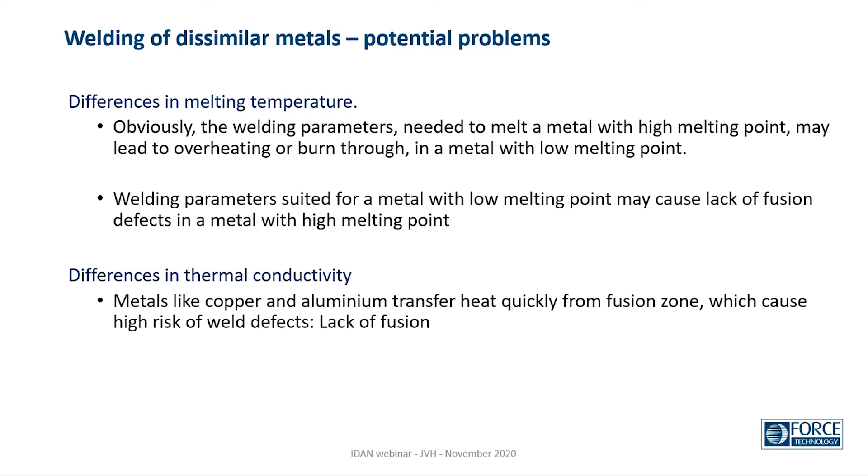Another issue is differences in thermal conductivity. Metals like copper and aluminium transfer heat quickly from the fusion zone, which causes a high risk of welding defects, such as lack of fusion.

We also see metallurgical problems, that is, problems with the metals in the melting zone or in the heat affected zone - brittleness caused by intermetallic phases, where metals combine in a way that causes brittleness in the weld metal. We might also have reduced ductility caused by precipitates. It's not strictly brittleness, but in a bending test there would be problems if we have too many precipitates, such as carbides or nitrides.

We might also have solidification cracks due to segregation in the weld metal, and differences in the necessity or response to weld preheating. One material might need preheating, while another would suffer from too much preheating. If we try to combine them, we need to find a compromise.

The same goes for post-weld heat treatment. Some metals would need it, and others would suffer poor properties after the same heat treatment.

We see differences in thermal expansion coefficients, which might lead to thermally induced fatigue. It's not a problem during welding, but in applications afterwards. If temperature goes up and down, the two parts don't follow each other exactly, and we might get cracks in the weld or next to it, depending on what is the weakest point.

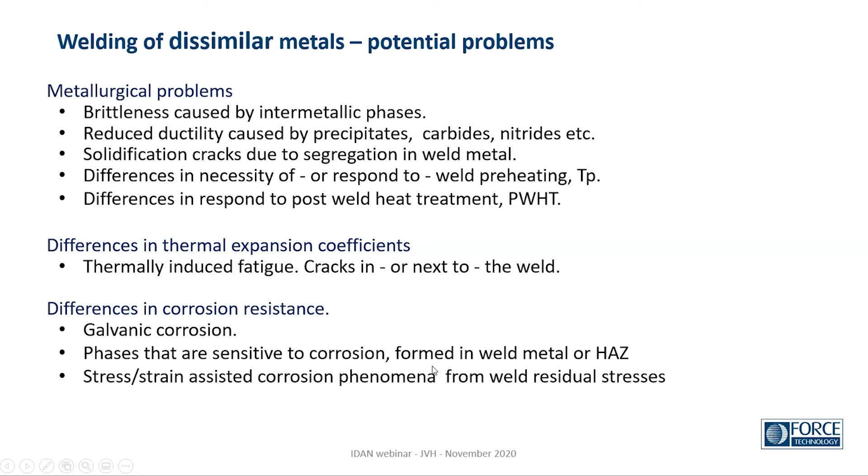In the weld structure itself, we might get phases sensitive to corrosion formed during solidification. We also have residual stresses around a weld, and some corrosion phenomena are related to these stresses. Of course, items which have not been welded don't have these stresses, so there's less risk of corrosion.

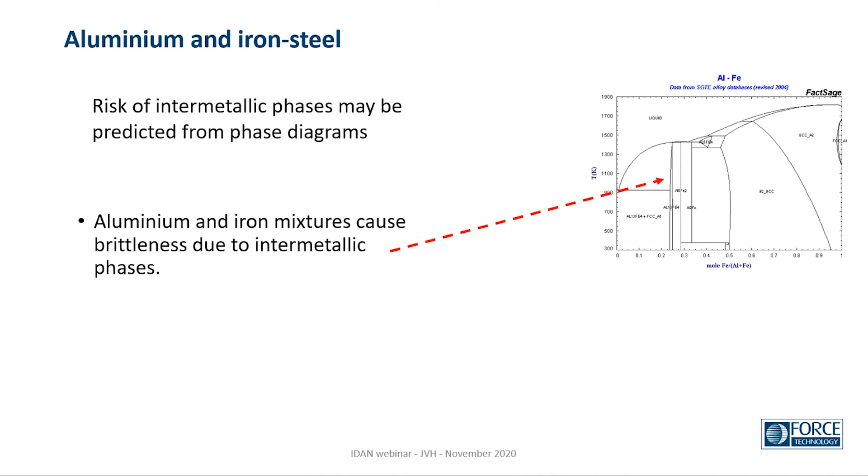An example: if we try to weld aluminium and iron or steel, we have a high risk of intermetallic phases. Theoretically, we could look at phase diagrams and see that this combination of metals has areas where these intermetallic phases form. So we can predict that if we're in this combination range, we might get problems, and these phases cause brittleness in the weld metal.

Titanium is another metal that's problematic to weld to other metals. It's almost impossible to weld titanium to other metals by conventional fusion welding - we get brittle phases with most other metals. As I've read, though I haven't tried myself, if we weld a titanium part using stainless steel filler metal, we can hear cracks forming, creating noise during welding.

There are some metals that we might be able to weld titanium with, such as zirconium, tantalum, or niobium. We do see that some problems with dissimilar welds, including titanium, are controlled by using tantalum as a buffer layer, but it's very rare to see it done.

Some examples of welding titanium to an iron-nickel-cobalt alloy - you can see the cracks that have formed due to the brittleness.

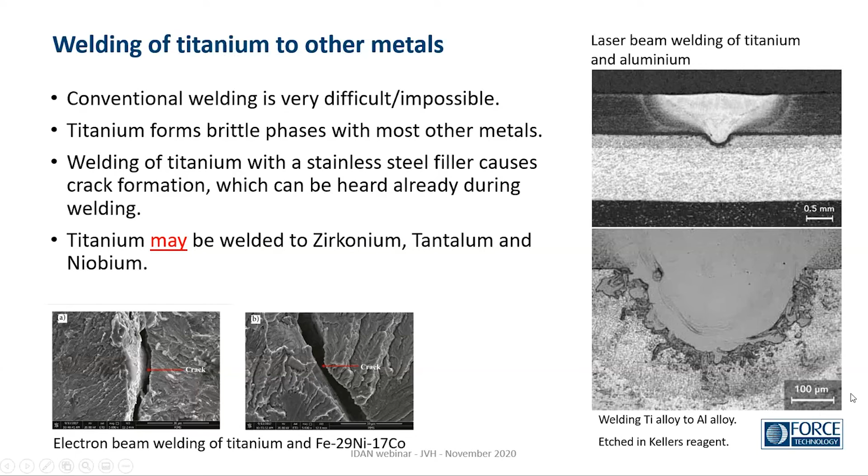A similar example for aluminium to copper - it appears as if we have made a joint, but when we look into it, the border faces are cracking, and we can't put any loads on a joint like that. It will crack or come apart.

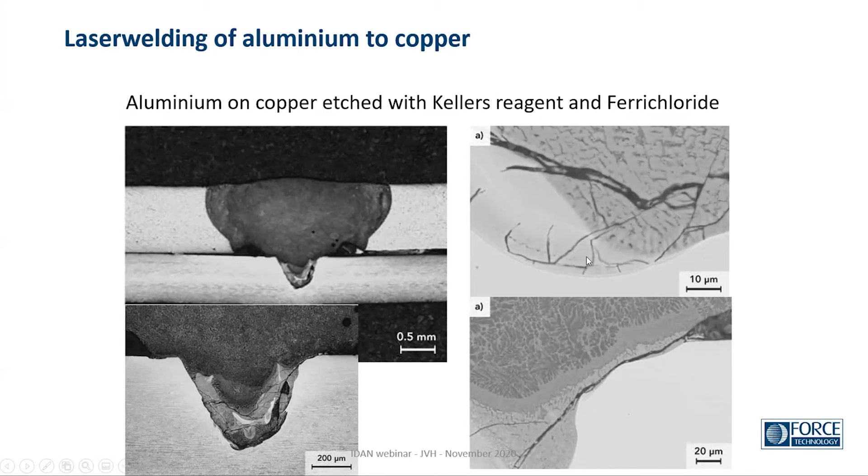We also have copper to iron, which is giving problems with solidification cracking. In this example, we have a crack along the center of the weld. Some of you might recognize it as similar to hot cracks that we see when the surfaces are contaminated or the material is high in sulfur.

Here we have made a similar crack by increasing the copper content. In fact, it's a sample that I've had made myself. It's a steel plate with another small part of steel on top of it, and between those two, a 1 millimeter sheet of copper. Welded together, we get these nice cracks.

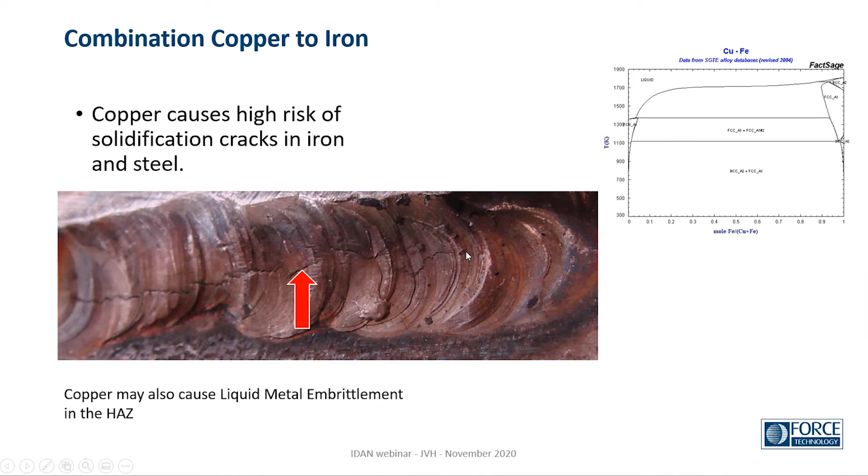A question? No. Okay.

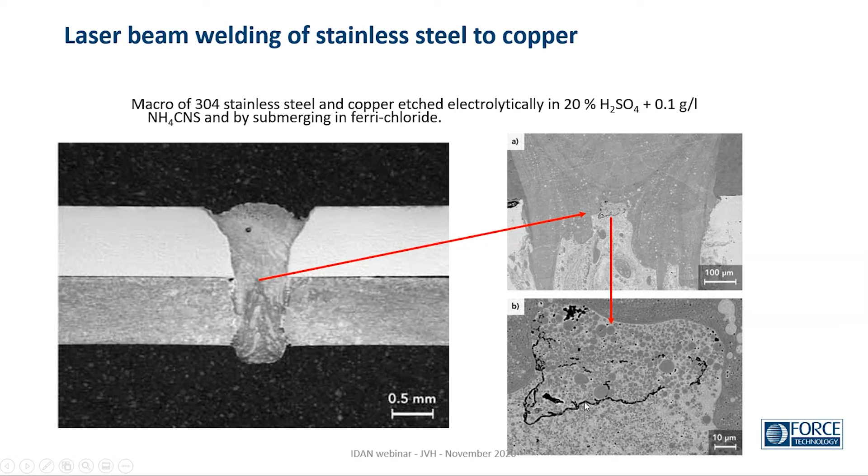Laser beam welding of stainless steel to copper. Again, we can see that we have succeeded in welding, but the properties of the joint are poor. We have cracks in the weld metal, which would probably release a fracture if loaded to a high load.

General remedies to the metallurgical problems. Some problems might be solved by choice of filler material, throwing the weld pool composition away from the risk of having intermetallics or solidification cracking, whatever the problem might be. A well-known example of that is welding stainless steel using the Schaeffler diagram.

It's a small one over here, we will return to it shortly. Or it could be using a nickel filler for the welding. Nickel is very much able to contain other metals and impurities, and by that avoid having problems.

We could also, the reason why laser has been researched into, is that if we can select a process and welding parameters to minimize segregation, then we would have less problems. The fast solidification works against having sulfur or whatever is causing problems concentrate during solidification. We have more grains and more grain boundaries to distribute the impurities on.

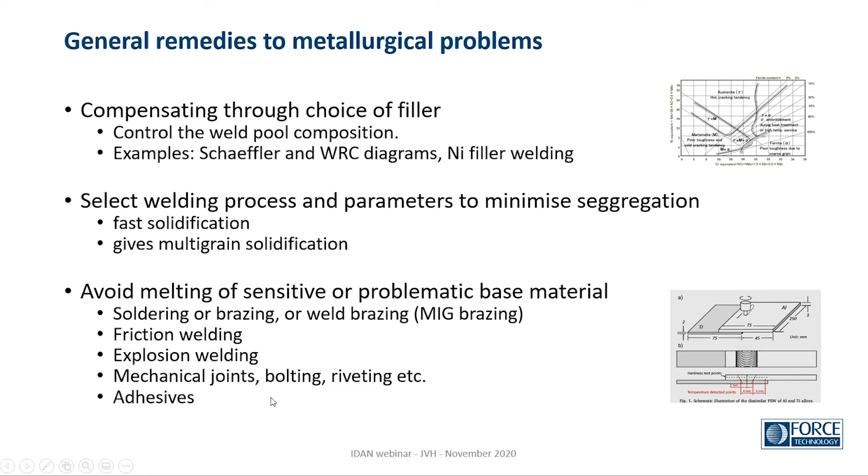So to list some of the processes that we might choose between: arc welding with compensating filler buffer, as we just talked about. Weld brazing might be MIG or TIG. It could be CMT, which is a process some of you might know, the cold metal transfer, which is a MIG process where the...

...formation of filler material is controlled so that we transfer it at the lowest possible temperature, but still above what we see in short-circuit welding.

Explosion welding. Friction welding includes the friction stir welding process, which we will also look into shortly. Ultrasonic welding is used, some of you might know it from welding of plastics, but there are some specific welding jobs which is made by ultrasonic welding.

I've seen very thin foils welded for electrical switches where they use ultrasonic welding. Diffusion welding, again, a very special technique where you have very smooth, very clean surfaces, pressed together and increase temperature. At a certain level of temperature, atoms would jump from one side to the other, and that way we will have a weld. It takes vacuum, it takes high temperature, and it takes time. So I think this is a research technique. I've seen very few examples of this kind.

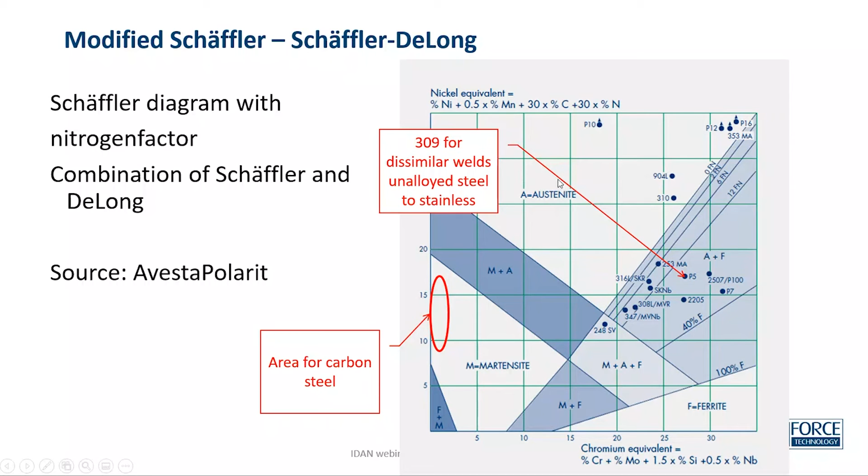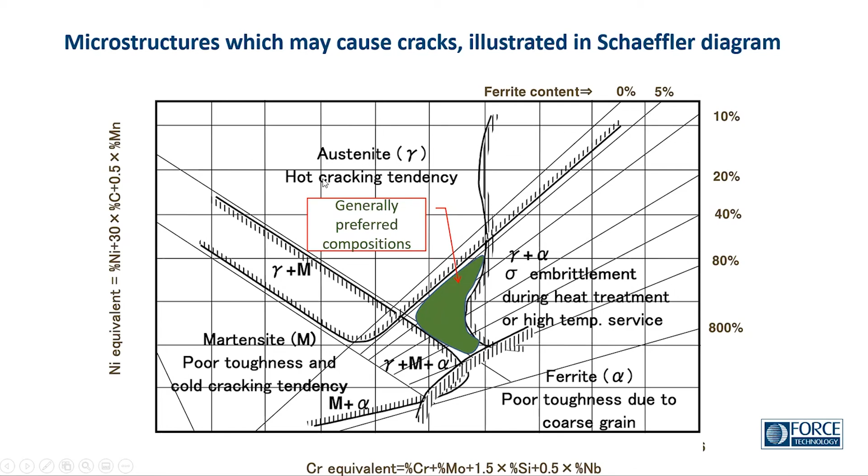But if we go back to this diagram, we would see that the nickel equivalent is high because it's directly related to the nickel content. We would be high up in this area, which means, going one step back, that we have to deal with a high risk of hot cracks. But that can be handled by the groove design and the weld process itself.

An example here of a filler called 4061, welded with TIG, with argon or helium or mixtures of those as shielding gas. We can use MIG or TIG to weld it, and we get strength at this level. So that's a filler material which can be used to solve some problems.

Sorry, yeah, I have one question. Hello? Yes, thank you. I want to begin by just thanking you very much for this really informative class.

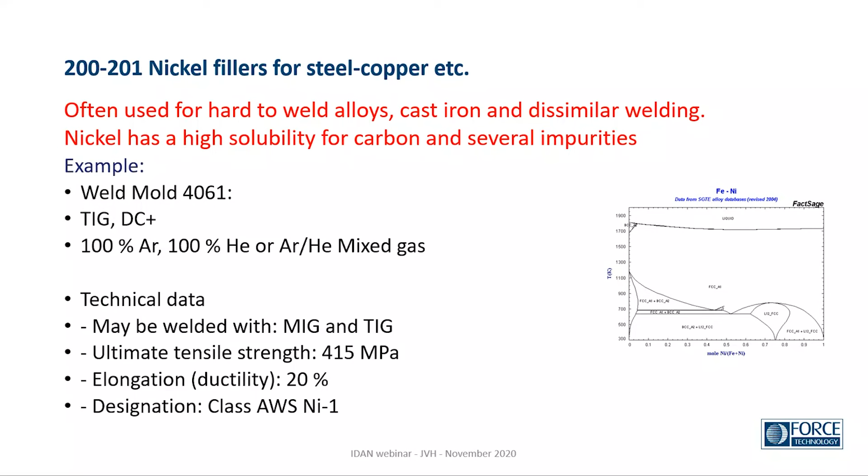But could you go three back? There was a graph on the lower right. Yeah, that one - one back, one forward. Oh, this one, yeah, on the lower right - what are you explaining exactly? Oh, that's the explosion welding. Sorry, I went by that a bit quickly.

Thank you so much. We'll get back to an application of this process shortly.

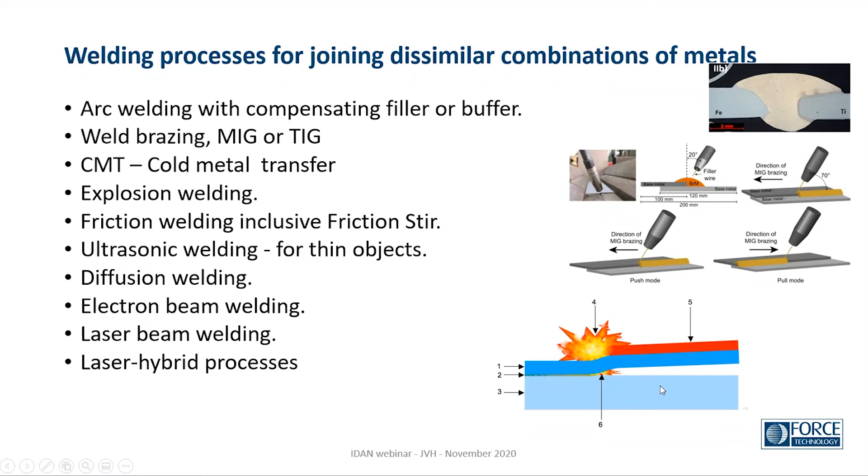An example of using nickel as a buffer layer when welding copper to steel. Nickel would be fully weldable to the steel side and also to the copper side. So if we buffer the steel with nickel, or both steel and copper, and then make a joint with the nickel in between, we can join these materials.

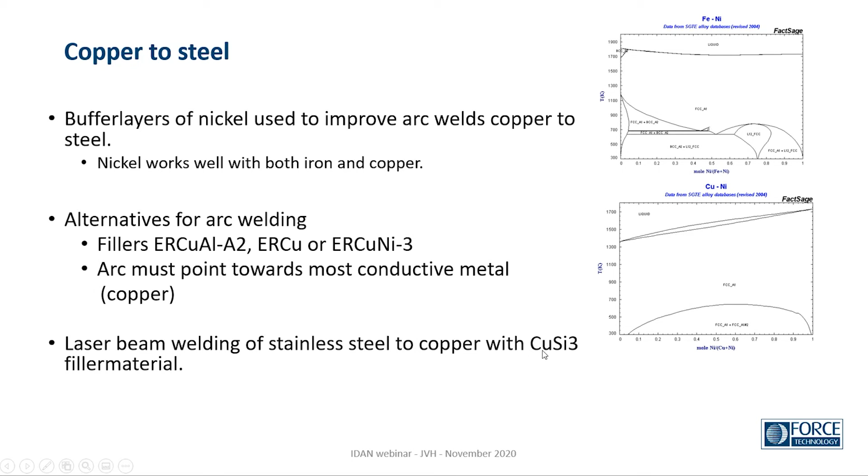There has been developed other filler materials, especially for this combination, like copper aluminium or copper nickel filler materials, which could be used. And of course, we talked about the heat convection or conduction from copper, so we need to point the arc between or against the most conductive metal, which in this combination is the copper. Laser welding with copper silicon filler has also been attempted.

And for an application using the explosion welded combination of steel and aluminium, the transition pieces are used to weld together things like ship hulls and the upper part of the ship, which might be in aluminium. As we started to say, you can't weld them together directly, so you need some transition between them.

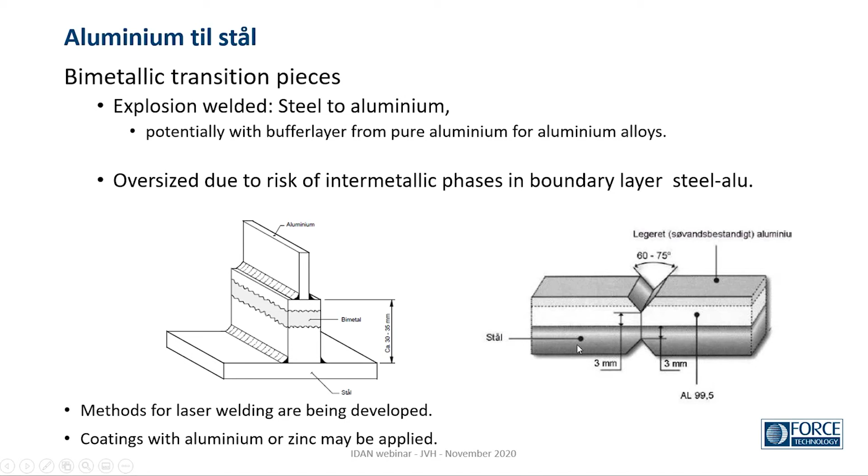You can use the explosion welded plate, cut into bimetallics as they're often called in English, where you have the steel, the aluminium combination layer, and the upper part also aluminium. Then you can weld steel to steel and aluminium to aluminium. It's also exemplified here where you can see the steel, the pure aluminium as an intermediate layer, and these alloyed aluminiums on top, one with more strength and more corrosion resistance. These have been explosion welded together as a part you can buy for making this combination.

There's no melting, so we don't get the solidification problems and the intermetallics forming in a melt. We can combine the materials and have cross sections like illustrated here. Combination of different metals is tricky because the deformation properties are very different in steel and aluminium.

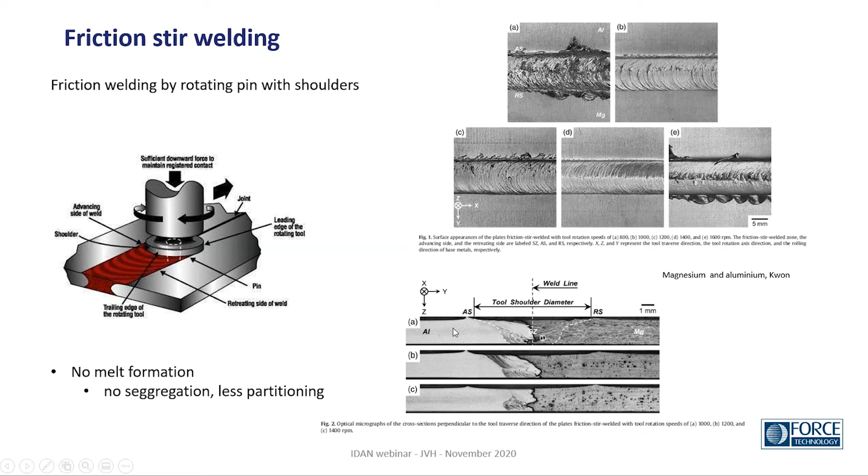But I know research is going on both to use this process further for aluminium, but also for combination of different metals. In this case, it has been attempted with magnesium and aluminium, two different types of metal, in a friction stir welding.

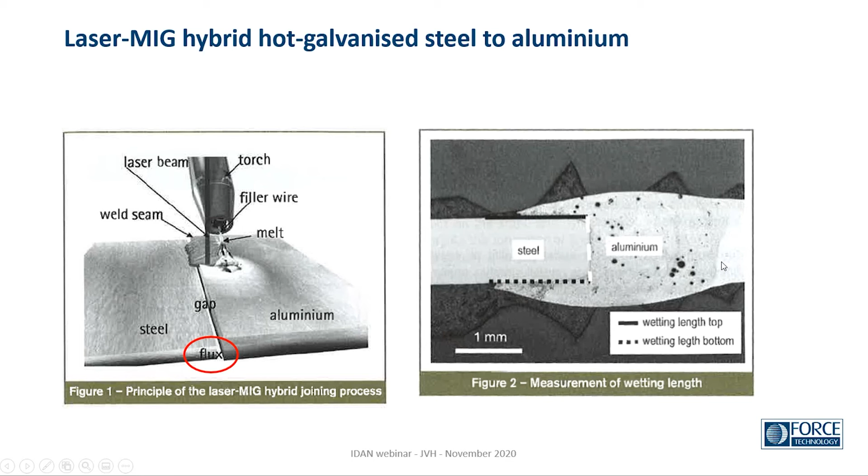I was also asked to say a little about corrosion and the effect of welds on corrosion. To start with corrosion itself, it's a process where we dissolve a metal. For that process to run, we need the electrons formed in this process to be used in another process. Otherwise it will stop after some time - it would be saturated in the electrolyte, in the environment, and will almost stop.

But if we have another process which uses the electrons, then we have the corrosion cell going on. The electron consuming part is oxygen, or it could be hydrogen. So we need this process, what we call the cathodic reaction, to have the dissolution of metals in the anodic reaction go on. If we don't have these two processes in the same environment, same electrolyte, then it doesn't go on. And if we cut the contact, the lead between the two, then it will also stop.

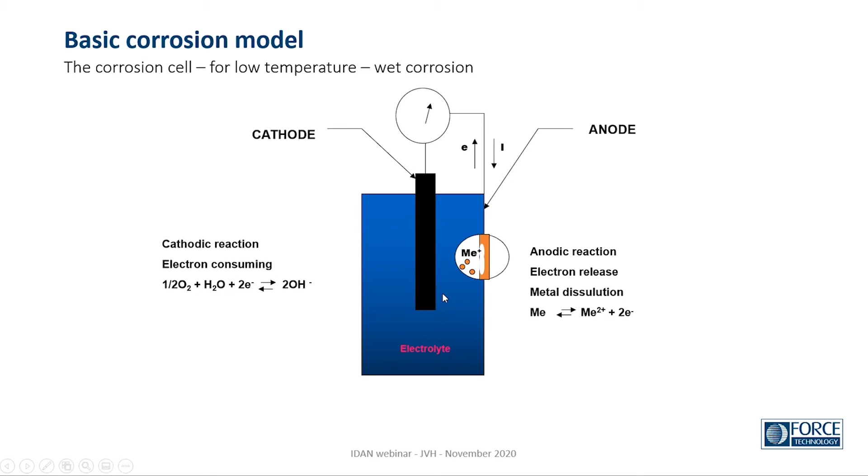We also need to see what happens when corrosion starts. Does it go on like this, or does it form some kind of protection? The ultimate protection is to have a passive layer on the surface. If we have a dissolution, it might go with the extent of corrosion over time like this - there's a little protection from rust as an example, so the rate is going down, but it will still corrode a lot.

But if it forms a layer on the surface, the corrosion products itself form a layer which protects, then we will have an initial corrosion, and then it would go to a very low level. That's what we see on stainless steel. We still have a little corrosion over time, but when it's so little that our equipment would last for thousands of years, perhaps, then we consider it sufficiently resistant. So we have this layer of protection on the surface.

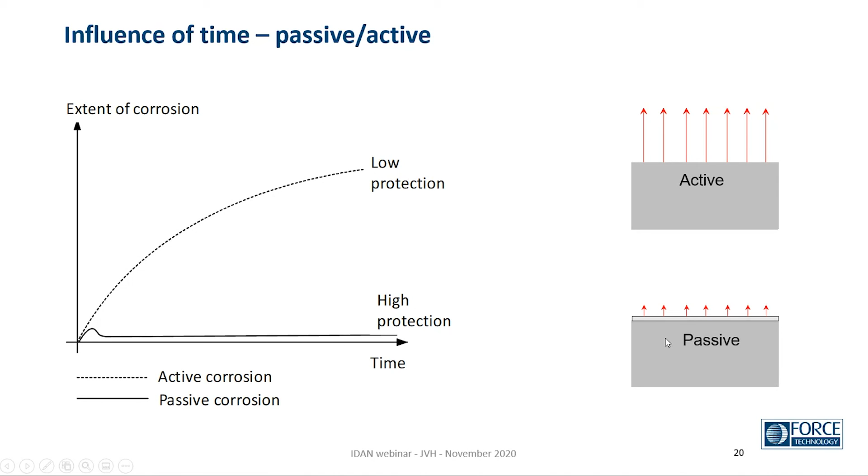We could have differences in the microstructure, often related to differences in composition from solidification in the melts, segregation, or formation of precipitates which would be more or less noble compared to the base structure. We could lose alloying elements that should give us corrosion resistance during welding, oxidized away, evaporated, or burned away. So we need to compensate for that - we'll often see that the weld metal is higher in alloying to compensate for this loss.

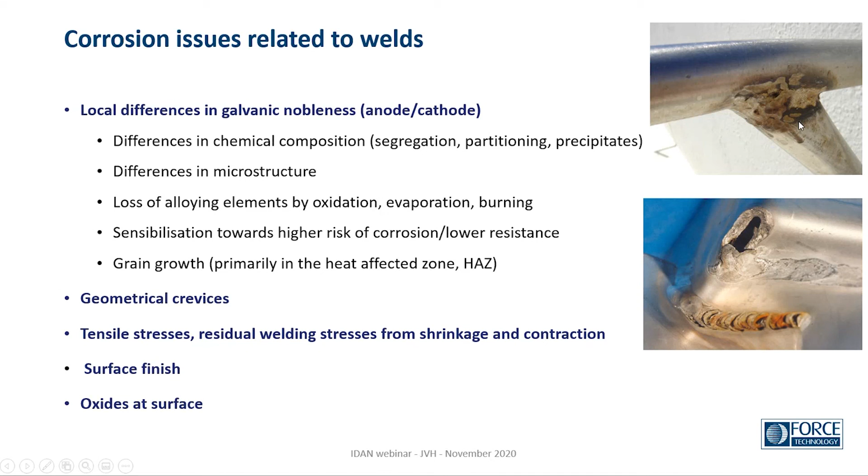As we talked about before, tensile stresses and residual welding stresses can cause problems. The surface finish in and around a weld would also affect corrosion resistance - oxides on the surface have an effect. And of course, the example up here in the corner, poor weldmanship would also mean this is more sensitive to corrosion. Any deposits or contamination would stick to this weld very easily and might cause problems.

To get a little overview of different problems with welds: we could have the weld metal itself not being as resistant as the base material, causing selective corrosion of the weld metal. We could have selective corrosion in the heat affected zone - that would be a risk if we have a very noble weld metal and no protection of the material. Then the part closest to it would be sensitive, or it could be the precipitates or grain structure in the heat affected zone which causes it to be more sensitive to corrosion.

We could have what's called intergranular corrosion, which is corrosion around the grain boundaries in the metal caused by the heat from the welding, and it would often be a little away from the fusion line compared to the heat affected zone.

Some metals could cause knife line corrosion, which is sort of a HAZ problem, but only along the fusion line. In low alloyed steel, it would be related to too much sulfur in the material, and in some stainless steel with titanium or niobium, it could be something about the carbides dissolving and forming during the welding process.

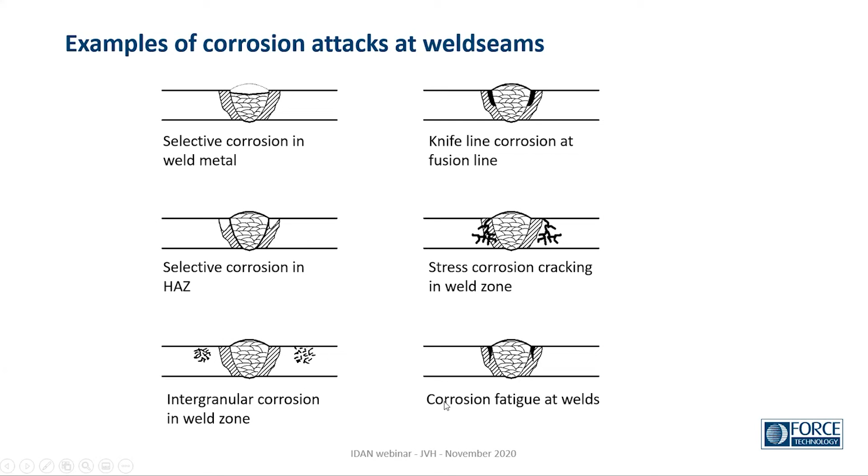The reason for the problems was that there was used a basic electrode with a relatively high amount of silicon and manganese, which caused some hardening elements in the microstructure that would be noble to the structure around them, and by that the weld metal was losing its corrosion resistance. And of course, the ship hull was painted, but especially a problem for icebreakers is that the paint would be eroded, worn away by ice, opening for corrosion in the steel and the welds.

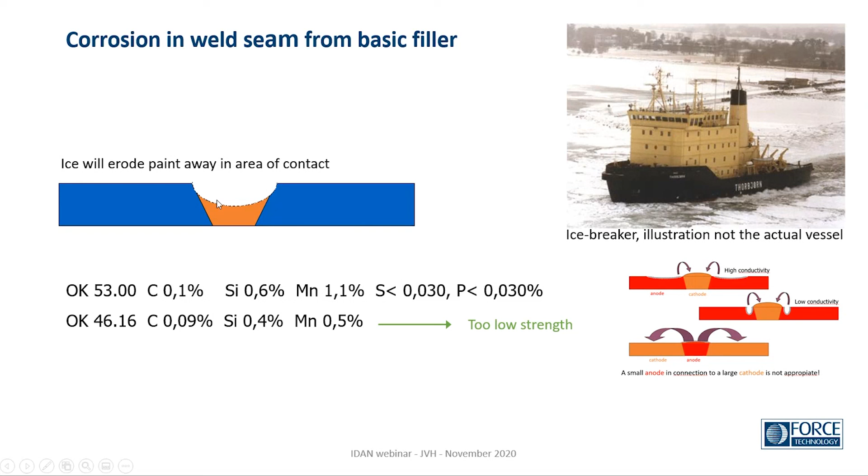What was done, as I recall, was to increase the alloying with a little nickel to get an overall higher corrosion resistance of the weld metal.

For higher alloyed materials like stainless steel, we could define a relative factor for their corrosion resistance, defined in a lab testing environment called ferric chloride. In a logarithmic diagram, we get a straight line for the relation between alloying and the temperature where it fails, the critical pitting temperature, using a formula where we have chromium plus 3.3 times the molybdenum content plus 16 times the nitrogen content.

So in the base material, increasing this parameter increases the corrosion resistance by the CPT, the critical pitting temperature. But if we melt the material in a weld, autogenous without filler material, it follows this line, a little below the base material. The finer the microstructure in the solidification, the faster the process, the closer these are together. The larger the weld pool, the more segregation, the more apart they will be. But when we reach a certain level of alloying, we can no longer have weld metal with resistance comparable to the base material.

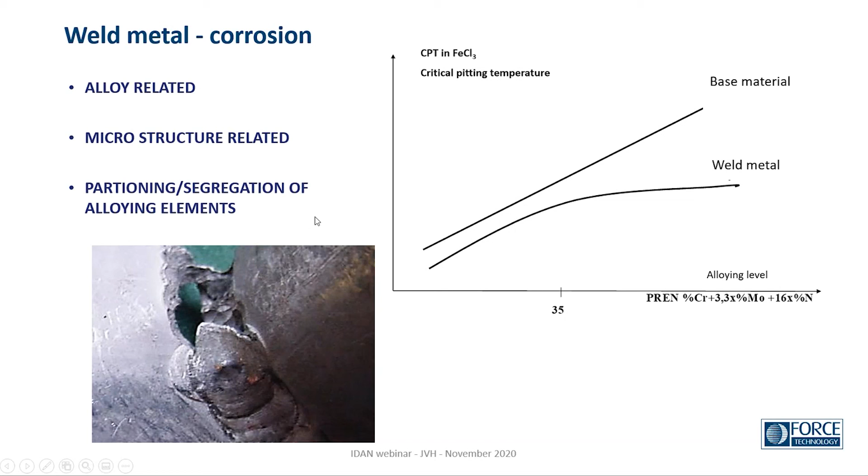I mentioned intergranular or intercrystalline corrosion and sensibilization, and it's related to the carbon content of the stainless steel. If the carbon content is too high, heat from welding might cause precipitation of chromium carbides, forming on the grain boundaries, because it's easier for carbon especially, but also chromium, to diffuse on the grain boundary, so it's easier to get enough chromium and carbon to form carbides. But when you drag chromium into carbides on the grain boundaries, you risk that there's not enough chromium left to secure the corrosion resistance along the grain boundaries, so that gets sensitive to corrosion.

If we say we have like 18-20% chromium in the grains as the average composition, we might get as low as 10 to 12 in this area, so obviously much less resistant. We have three ways to avoid that. If we can weld fast enough so we don't get so many carbides, we also reduce the sensitive areas around them. But if we don't, we get a situation where grains fall out due to corrosion along the grain boundaries.

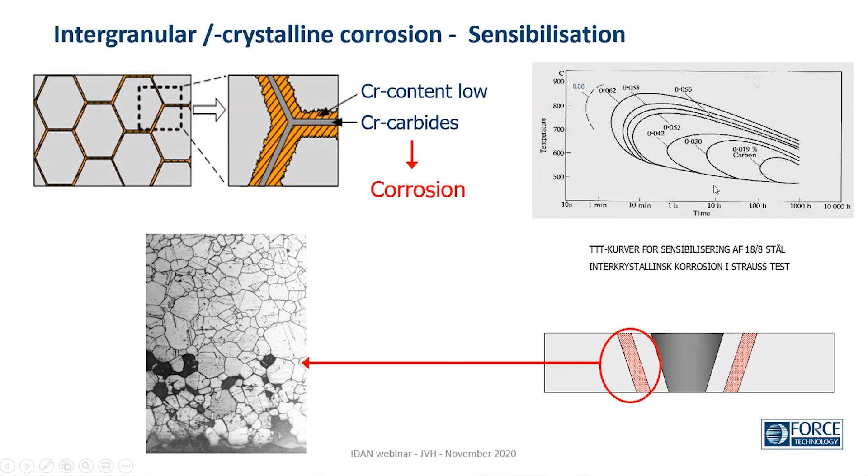Another way to do it, especially preferred in Germany, is to add titanium or niobium, which form carbides and reduce the amount of carbon available to make chromium carbides. So either a very low carbon content in itself, or addition of something which pulls carbon out of the material into other carbides that don't affect corrosion resistance. We call these stabilized grades.

I mentioned crevices, and of course this is not welded, but it illustrates a crevice from a flange towards a body. This has been in seawater, and the amount of corrosion is extensive, all the way down here inside the metal from the seal face. But also a weld defect like this one, stainless steel welded without full penetration, gives us a crevice which has started corrosion. This is in Danish domestic tap water. We have salt enough for causing this problem.

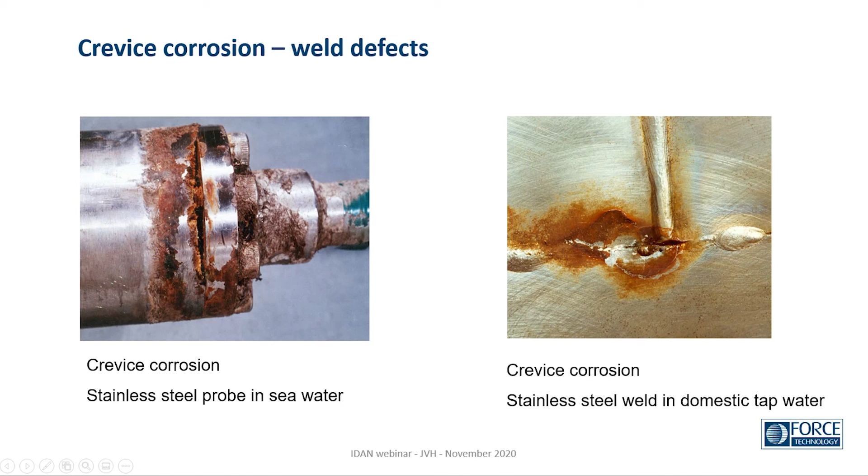The stresses we talked about could give stress corrosion cracking, which is a corrosion process combined with stresses that form cracks, which are both branched and form very quickly. In the laboratory, we can make stress corrosion cracks grow like 1 millimeter per day, per 24 hours. Fortunately, in the actual world it's not going that fast. But it is definitely a risk if we get into an area with sufficient salts, sufficient heat, and sufficient stresses—then you have this kind of problem.

The relation to welds is perhaps not so obvious in this one. We have a weld, not a very pretty one, but still a weld, and we have cracks going out from it. In this one, it's very obvious that it is the weld stresses. There is a stiffener welded to the outside, and we can see how stress corrosion cracking forms around the stiffener at the weld, going both around and perpendicular to it, out into the base material.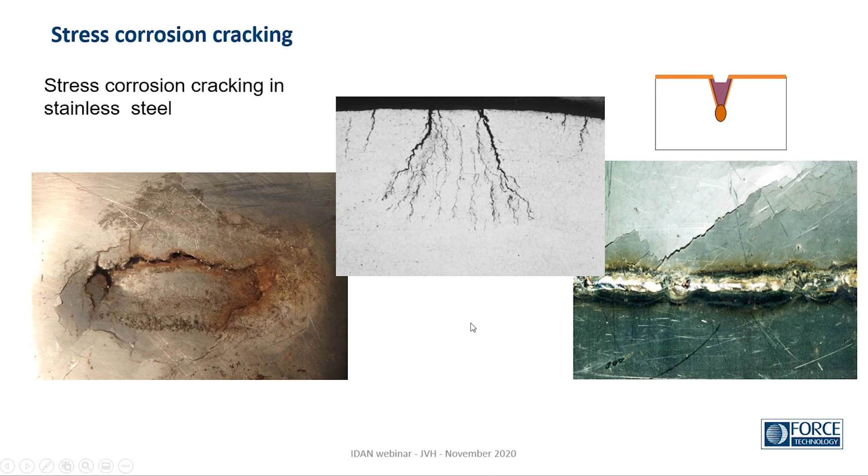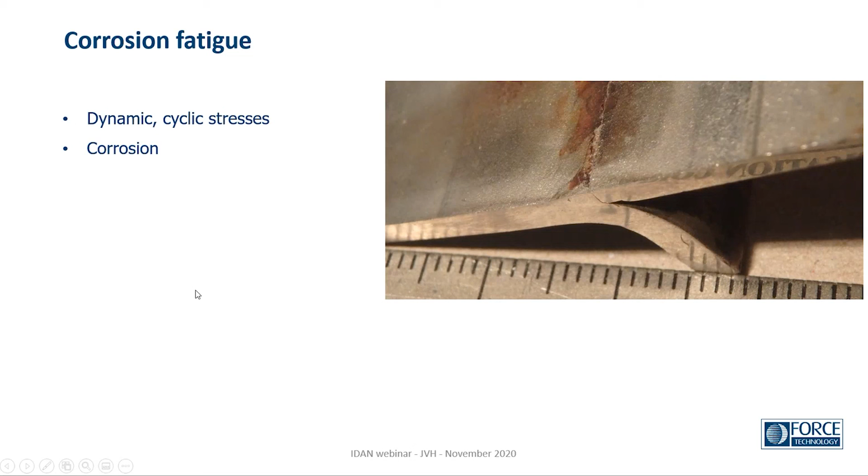And corrosion fatigue—I don't know if you can see it, but we have a weld here, and we have a fatigue crack running along this due to vibrations in this part. As I mentioned before, fatigue is one thing, but when you have corrosion on top of it, it will initiate faster and grow faster.

An example here of fatigue in air without corrosion, where we could have a stress level or amplitude of the stresses up to 380 or something like that in air. But if it's in a salt solution, it's not more than about 250. So it clearly illustrates how much difference corrosion does to fatigue, or might do.

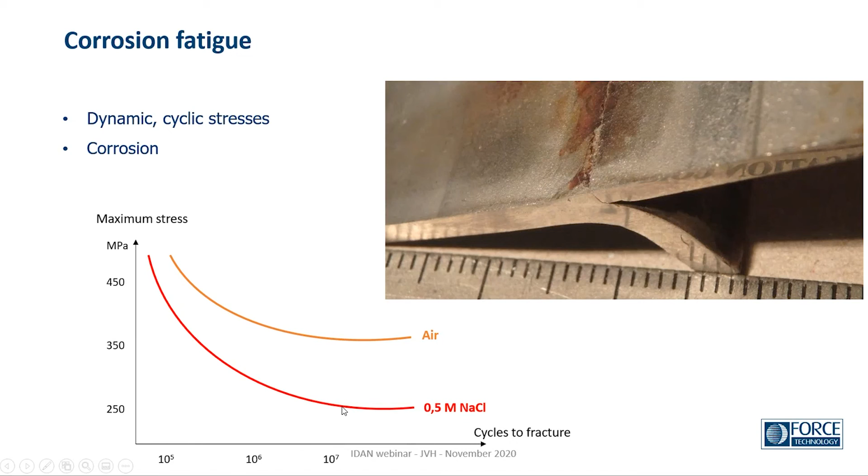Pitting, in this instance, is related to oxidation—oxidation along the weld. This is the internal side, the root side, and purging with gas has been attempted but has not been fully efficient. So we have pitting formation in this discolored, oxidized zone along the weld root. The reason it's so extensive on this side is that it is 304, and this is 316. If this was also 304, we would expect this area to be attacked as well. The reason for the difference between the two sides is probably that the purged gas came from the top and was heated over the weld, so the reaction is faster on this side.

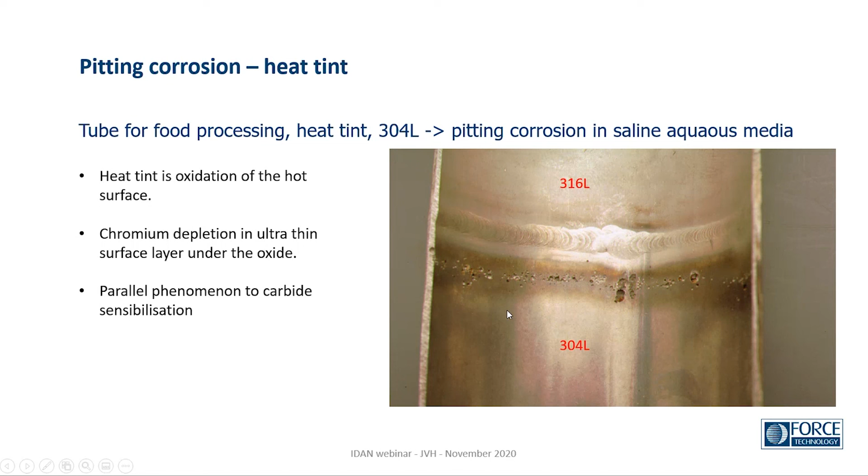In fact, this phenomenon is the same as we saw with the carbides. We have a depletion, a lower level of chromium, but not around carbides—here it's below an oxide layer on the surface. The oxide is rich in chromium, and when it forms, it drags chromium out of the material into the oxide, leaving a very, very thin layer—we're talking about micrometers below, which is sensitive. But once a crevice or a pit has formed, it will grow, even though it gets into sound material below this depleted layer.

Do we get any help from the standards to control this problem? In some ways, but not fully. We have a standard like this one, EN 12502 part 4, for protection of metallic materials against corrosion in stainless steel. It says that oxide films and scales highly increase the likelihood of pitting—so a red flag is raised to say you need to be alert, to be careful. If you have colors darker than straw, that strongly increases the likelihood of pitting. So there is an indication that we have problems, but this standard doesn't say you can't have it—it just says you should be careful.

Of course, if we don't have any protection at all, we will have both oxidation and heat tint well above straw color, and you can see corrosion has started—again, just a humid domestic water application. But this, on the other hand, is a perfect weld in an electropolished tube for pure water in a pharmaceutical plant—full protection with purge gas and a TIG process, which is probably automatic as it looks like this. We cannot see any corrosion; the yellow here is just reflections. It's in fact fully bright.

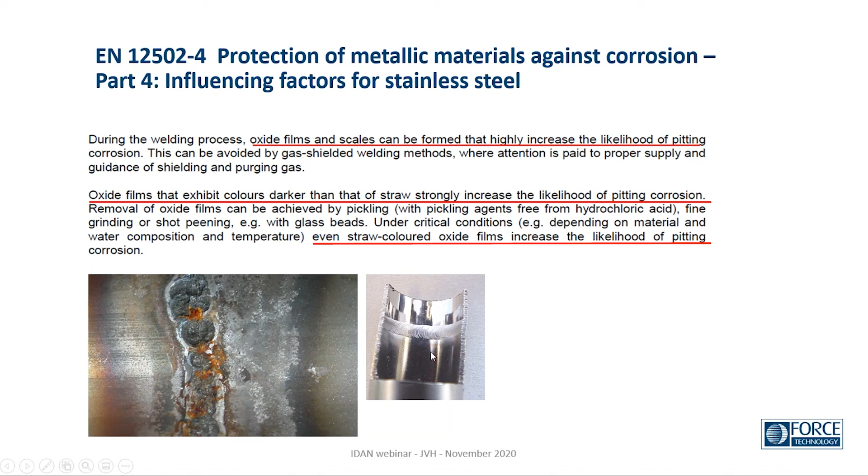To have a tool to inspect if corrosion is above or below the acceptable limit, for many years we have had a reference report with reference pictures to say we need something below the straw level. We defined by corrosion test that this was the limit. Above that, we'd have surfaces sensitive to corrosion, and at this level and below would be almost unaffected by the weld process.

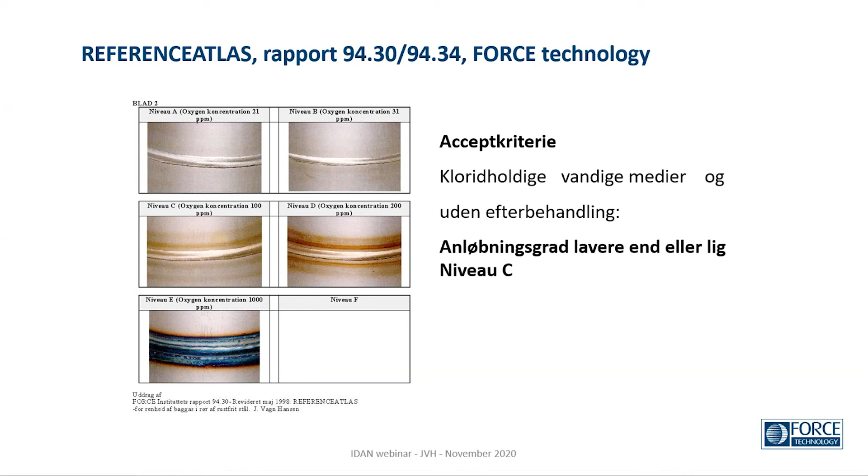So if we want a weld which could be exposed to water with a certain level of salt in it, we would need something below the C level. If, on the other hand, we clean it with an acid able to remove both the oxide and the chromium-depleted layer below it, then we could accept up to this level. This could be removed and restored by pickling.

But if we go to the highest level, up here we have a scale which would take too long to dissolve in the acid. So we don't recommend going to that level, even if pickling is applied.

This is just an illustration of the different problems we could have with contamination and oxides, which would be cleaned away if we do a pickling. The drawback of pickling is that on a microscale you get a rougher surface because the acid attacks the grain boundary slightly, so you don't get the same result as a polished surface after pickling.

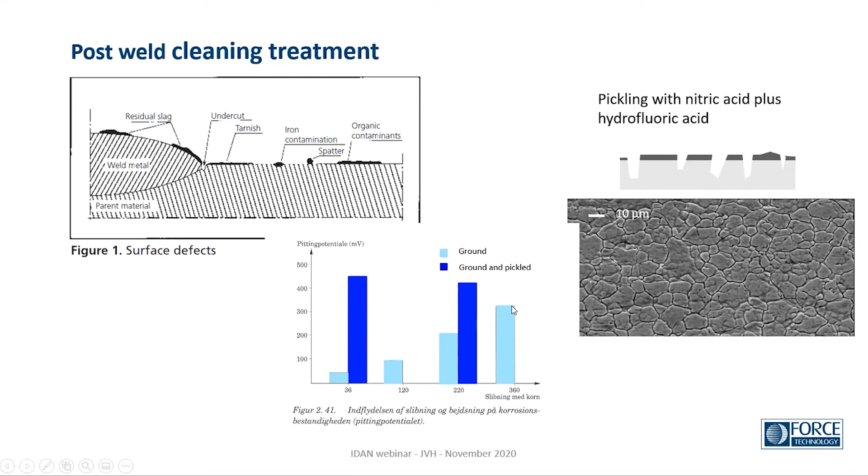But we can see the effect here that we have very good corrosion resistance when we pickle. If we only grind to get rid of the oxides, we would not get as much improvement. The finer we grind, the better it gets, but still not the same as pickling to solve the problem.

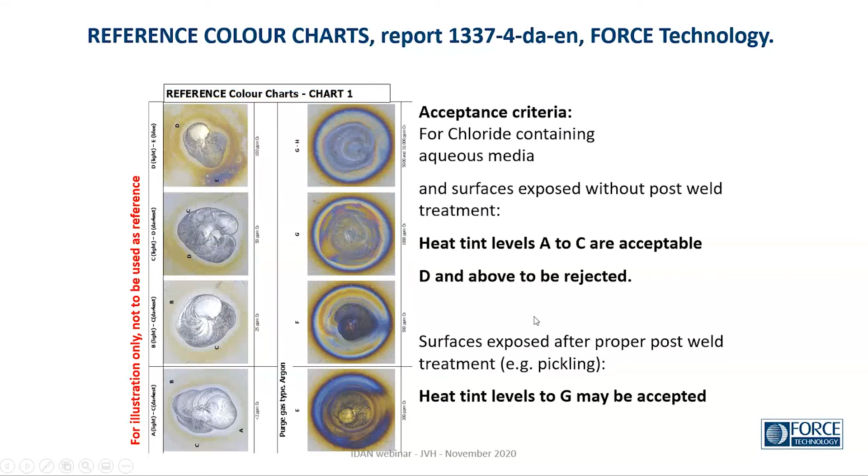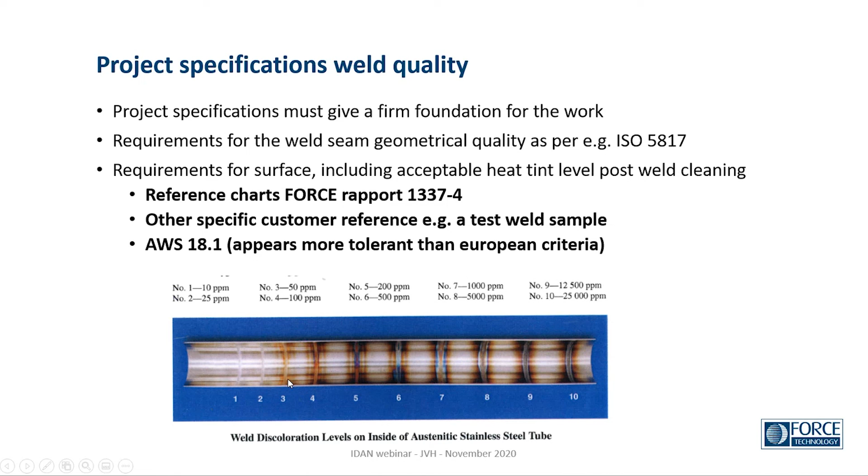Just to mention that the references we provide also have an American standard equivalent. We were first, I could say, but some years later the American Welding Society made a standard called AWS D18.1 with reference pictures like this, where you could define that you want your welds to be at level 3 or better. They appear a little darker, but you have to be aware that the printer or monitor you use would be slightly different, so in fact the sample might be a little less red than this one in the actual world.

If we want to test if our weld has succeeded, we could use a corrosion test. A very popular one is the G48 test, which uses ferric chloride, which we also saw on the graph earlier for the pitting temperature used to define the pitting resistant equivalent, the PREN value. Here is the test solution we use, and after a certain exposure you shouldn't see pitting.

We also check the weight: how much could this test reduce the weight of our sample? So there are two parameters - it mustn't reduce the weight too much, and it mustn't cause pitting corrosion like seen in this one.

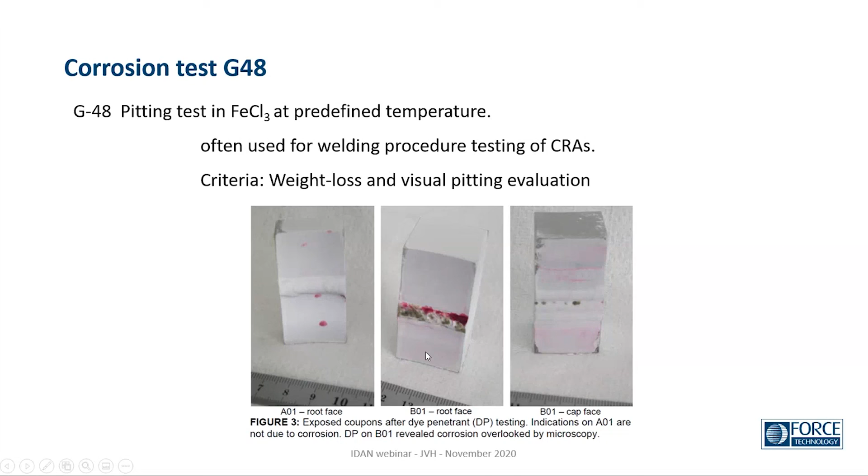Just to finish off, the effects of welds on corrosion protection by painting. Some examples: if we have a weld, there's of course the weld cap, which might give an uneven surface on the paint. So if it has been ground, it would be a better surface on the paint. But still, there's protection - it might lead to contamination or dirt collecting along the weld if you have too high a weld cap, and underneath this the paint might be challenged and corrosion could start.

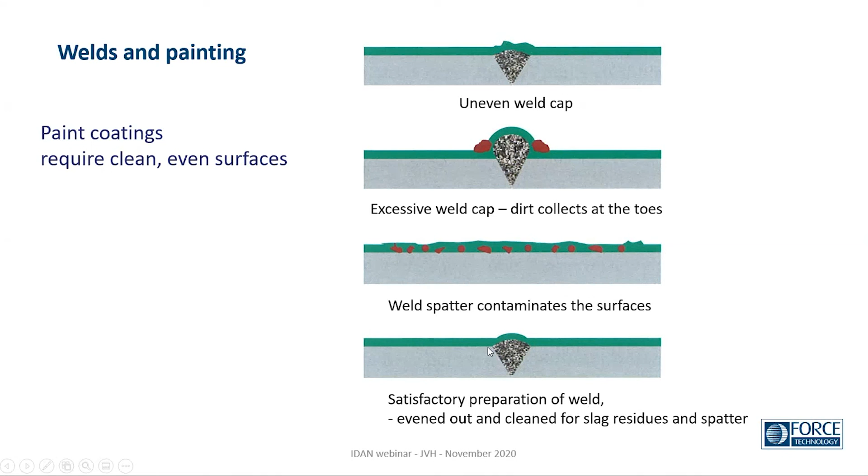Worse, if you have contaminants, weld spatter, or slag on the surface below the paint, then the effective thickness of the paint is very poor at some of these points, and you could get corrosion problems. So a smooth weld, clean from any spatter, slag, or other residues or contamination, that's the best way to get good protection from paint.